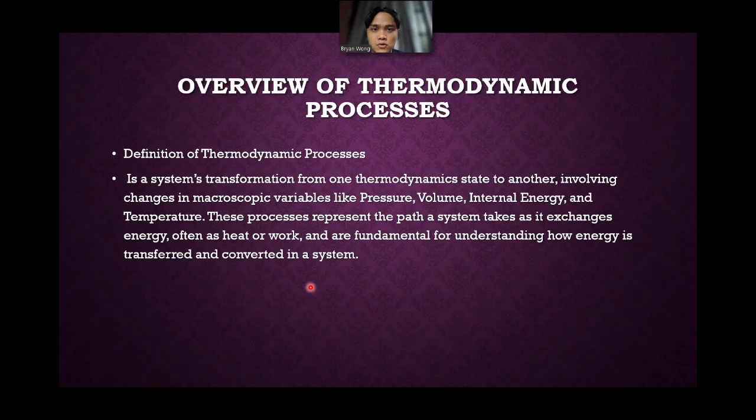So basically, thermodynamic processes discusses the exchange of energy - how it is transferred or converted. So what is the importance of thermodynamic processes in practical applications? Thermodynamic processes are fundamental in many applications, especially in the field of engineering, energy, and environmental science. They help engineers and scientists improve energy efficiency, design and optimize systems, and solve complex problems.

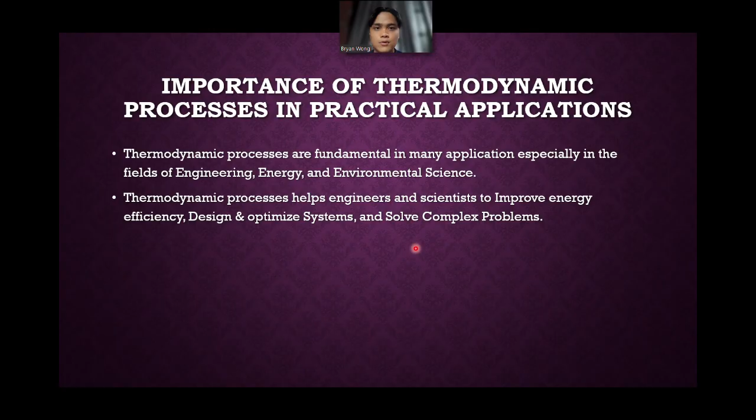Next, energy conversion and efficiency. Thermodynamic processes are the heart of energy conversion systems. Examples that use energy conversion systems are heat engines, refrigerators, and power plants. By understanding the laws of thermodynamics, engineers can maximize efficiency in internal combustion engines, for example in cars, aircraft, and power plants.

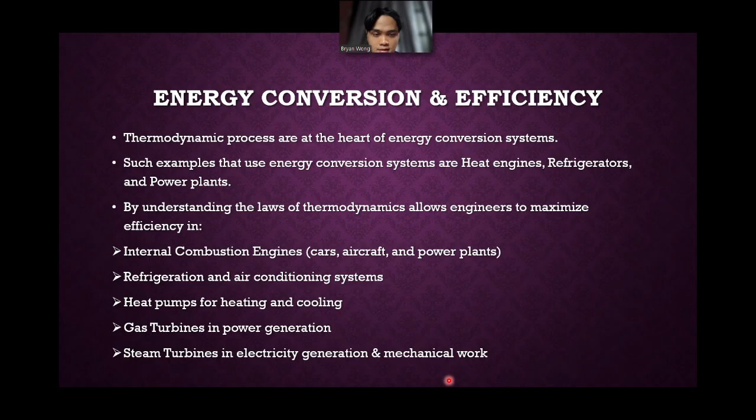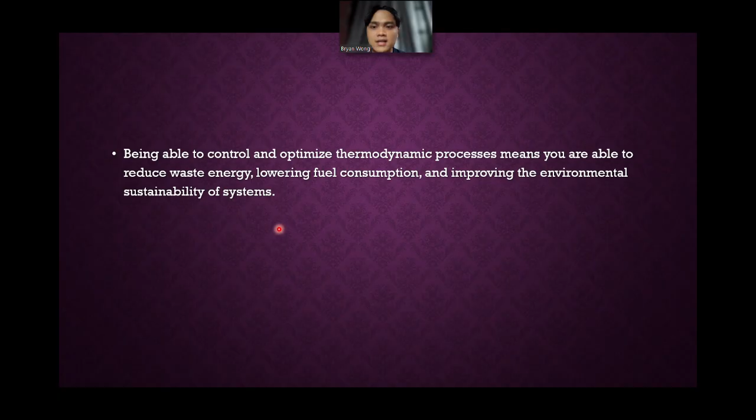Next, refrigeration and air conditioning systems, heat pumps for heating and cooling, gas turbines in power generation, and last but not least, steam turbines in electricity generation and mechanical work. Understanding thermodynamic processes allows us to maximize efficiency. Being able to control and optimize these processes means you are able to reduce the loss of energy, lower fuel consumption, and improve the environmental sustainability of systems.

Next, design and optimization of power systems. In thermal power stations - coal, gas, and nuclear for example - thermodynamic processes govern the conversion of heat into mechanical energy and electrical energy. The Rankine cycle, used in a steam turbine, and the Brayton cycle, used in a gas turbine, are examples of thermodynamic cycles that determine how efficiently a system can convert thermal energy into work.

Next, the first law of thermodynamics has relation to conversion of energy, helping us understand energy input or output relationships. The second law of thermodynamics dictates that some energy will always be lost as heat and sets the upper limit on efficiency.

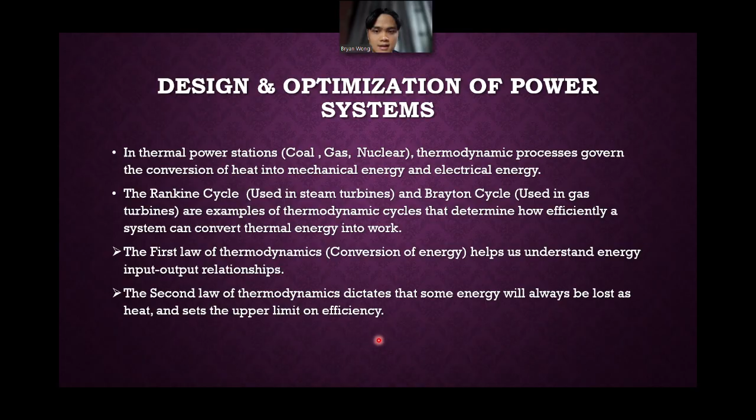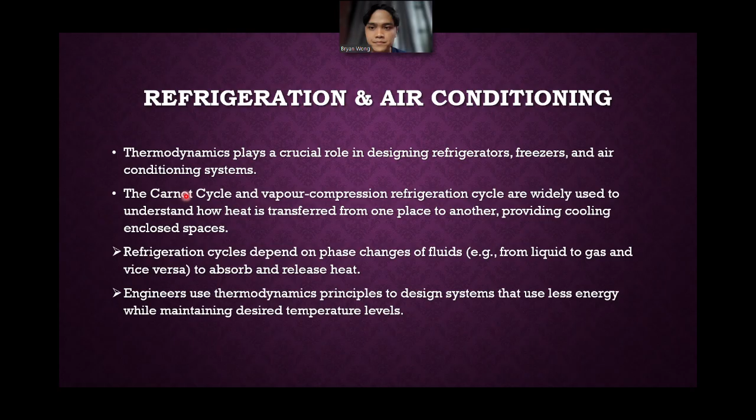Now, refrigeration and air conditioning. Thermodynamics plays a crucial role in designing refrigerators, freezers, and air conditioning systems. The Carnot cycle and vapor compression refrigeration cycle are widely used to understand how heat is transferred from one place to another, providing cooling to enclosed spaces. Refrigeration cycles depend on phase changes of fluids, for example from liquid to gases and vice versa, to absorb and release heat. Engineers use thermodynamic principles to design systems that use less energy while maintaining desired temperature levels.

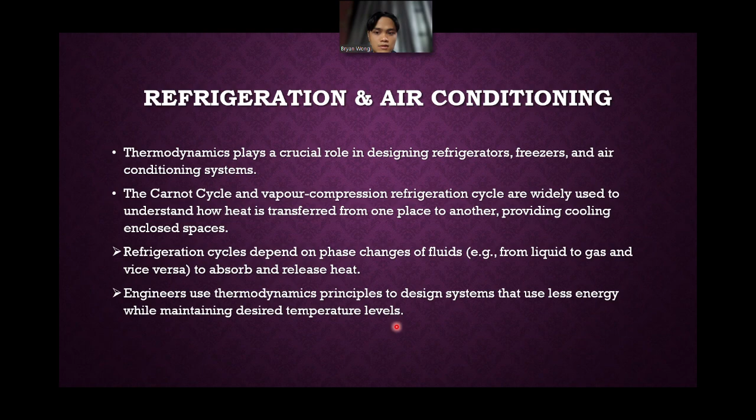So that is basically thermodynamic processes - we want to design something in order for it to be efficient and use less energy. Next, environmental impact and sustainability. Thermodynamic processes are critical in designing systems that minimize environmental impact. For example, combustion processes in engines and power plants emit greenhouse gases. Understanding the thermodynamic principles of combustion allows the design of cleaner, more efficient engines and reduces carbon emissions.

Next, waste heat recovery systems aim to capture excess heat from industrial processes or power plants and convert it back into usable energy, reducing waste and improving overall system efficiency.

Okay, so that is the environmental impact and sustainability of thermodynamic processes.

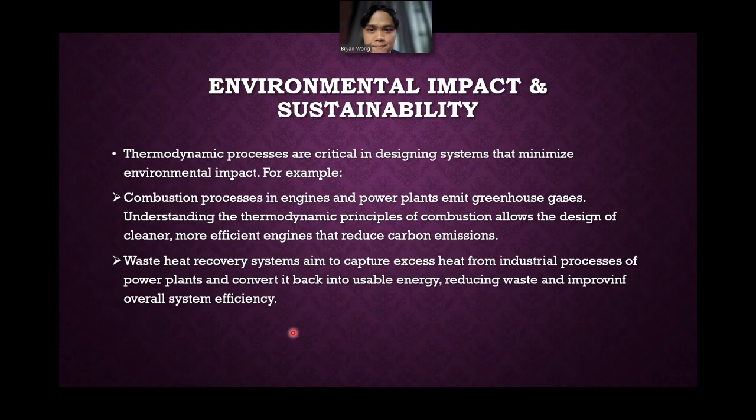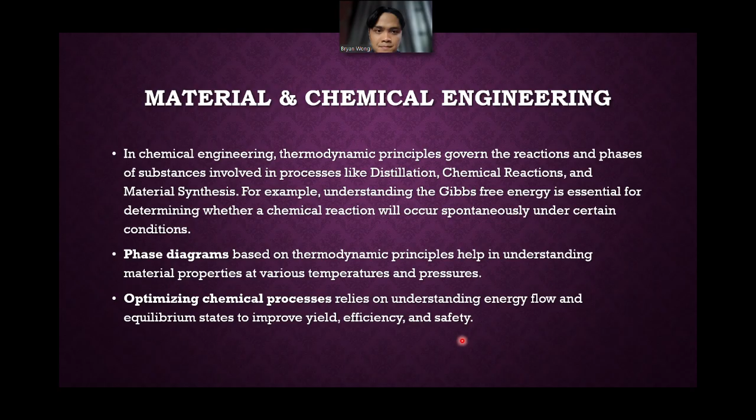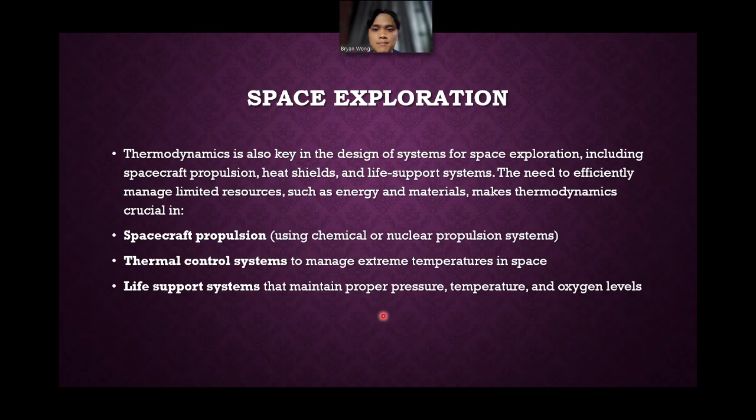The first aspect is spacecraft propulsion using chemical or nuclear propulsion systems. Next, thermal control systems to manage extreme temperatures in space. Next, life support systems that maintain proper pressure, temperature, and oxygen levels. So this is the importance of thermodynamic processes in space exploration.

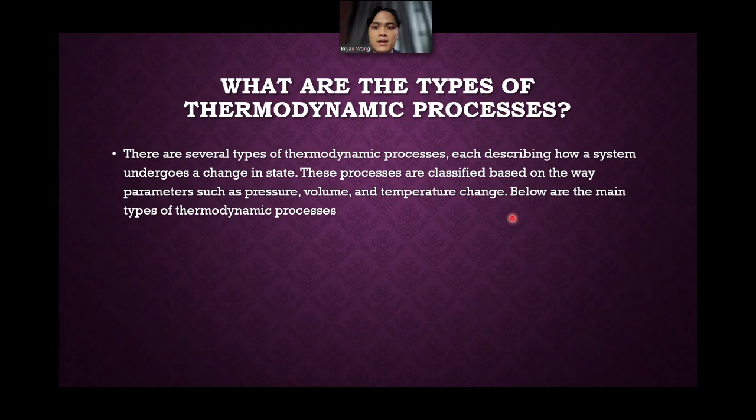Let me explain. First, one of the thermodynamic processes is the isobaric process, also known as constant pressure. The definition of isobaric process is that the pressure of the system remains constant while other properties like temperature and volume change. Example: heating water in an open container, where the pressure remains constant at atmospheric pressure.

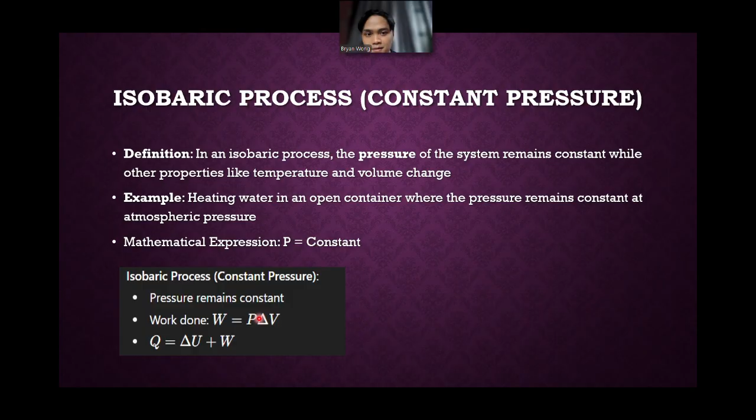So the mathematical expression is shown here: P is constant. This is the isobaric process. The pressure remains constant, and the work done is W equals P times delta V. So Q equals delta U plus W. This is the formula and mathematical expression for isobaric process.

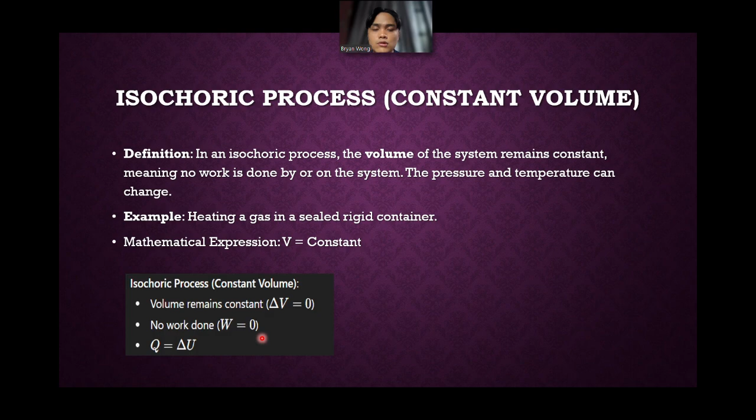Okay, next one is the isothermal process, or constant temperature. The definition is: in isothermal process, the temperature of the system remains constant, meaning the heat exchange is fully used to do work or change the system's internal energy. For example, slow expansion or compression of gas in a cylinder that remains at a constant temperature. The mathematical expression is T equals constant, temperature is constant.

This is the equation for isothermal process: temperature remains constant, delta T equals 0. Internal energy remains constant, delta U equals 0. So work done is W equals Q.

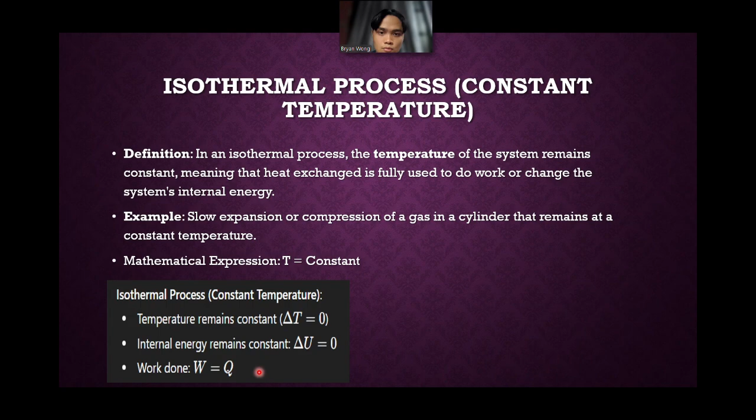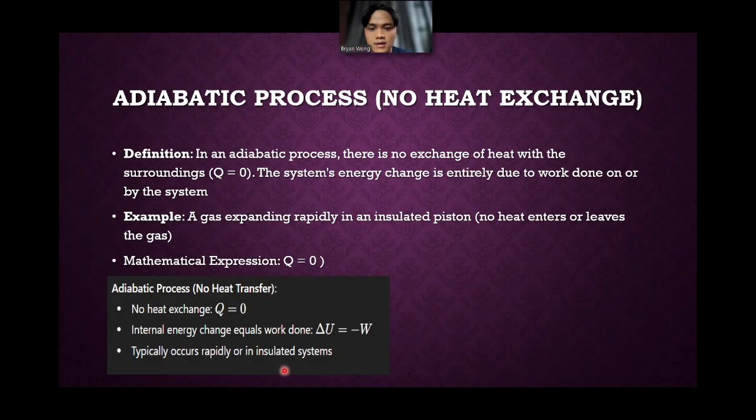So we have learned about the types of thermodynamic processes already. Now let me explain the first law of thermodynamics to you. What is the first law of thermodynamics? This one is not alien to you, you know and you've heard about it. The first law of thermodynamics clearly states that energy cannot be created nor destroyed, it can only be transformed. That is the first law of thermodynamics.

The mathematical formulation for this law is delta U equals Q minus W. Delta U equals change in internal energy, Q is the heat, W is the work done. The application is how it governs the conversion of heat to work in engines and other systems.

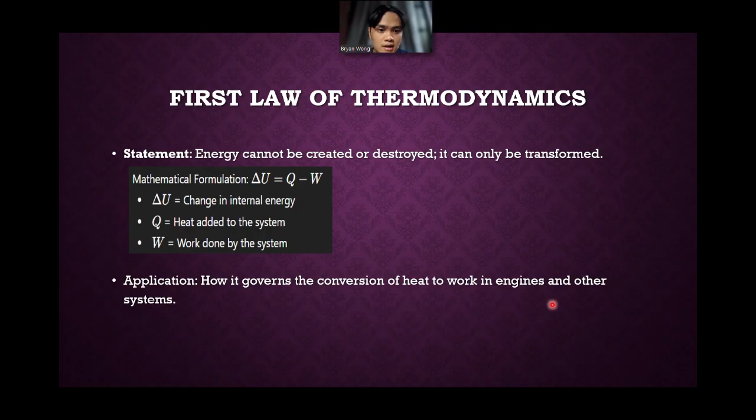Next is key thermodynamic quantities. Heat is represented by Q, energy transferred due to temperature difference. Work, represented by W, is energy transferred when a force acts over a distance. Next is internal energy, U, the energy contained within a system.

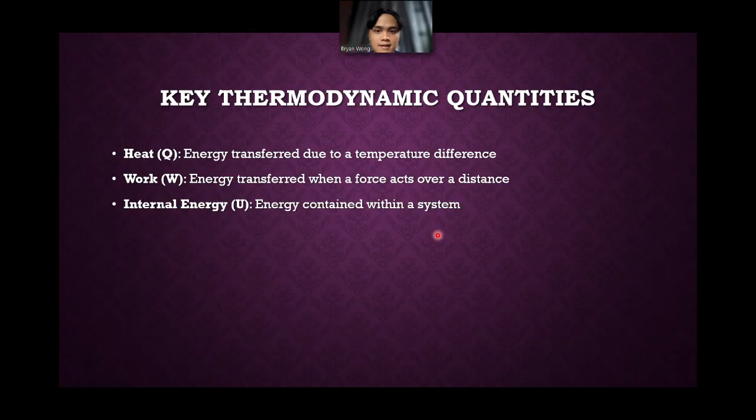Next is work done by expanding gases. This is the formula for work done by expanding gases, in various processes.

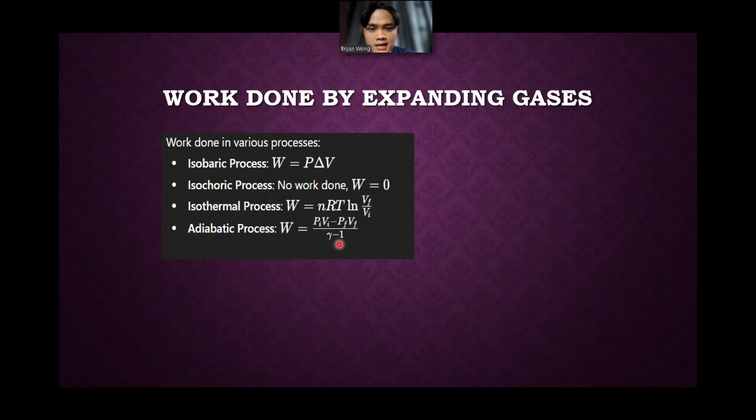In an isobaric process, the work done formula is W equals P times delta V. For an isochoric process, there's no work done, so work is 0. In an isothermal process, work equals N times R times T times ln(Vf over Vi). In an adiabatic process, work done equals this formula here.

Now next is thermodynamic cycle. The definition is a sequence of processes that returns a system to its initial state. Examples of thermodynamic cycles are the Carnot cycle, Rankine cycle, and Brayton cycle. Each of these cycles involves a series of isothermal, adiabatic, isobaric, and isochoric processes, which we have gone through just now.

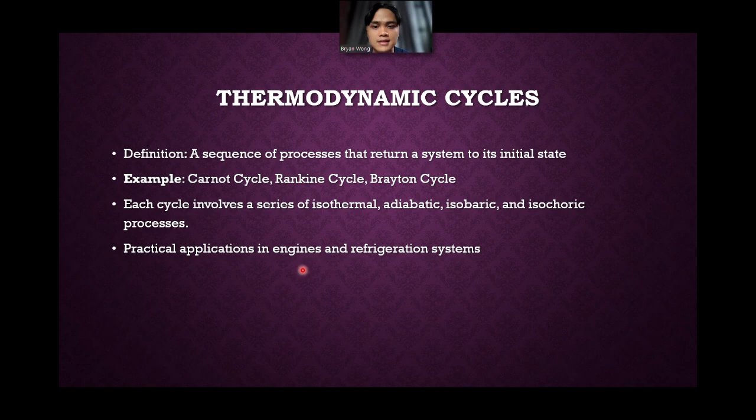Practical applications are in engines and refrigeration systems. All of this can be seen applied in engines, aircraft, and refrigeration systems.

Next, thermodynamic processes in real world systems. This is an example, they can be seen in real world systems. As you can see, steam cycles: work is done in power plants. In internal combustion engines it's the Otto and diesel cycle. In air compressors it's adiabatic compression. In refrigeration systems it uses the vapor compression cycle. This is the example of real world systems that use thermodynamic processes.

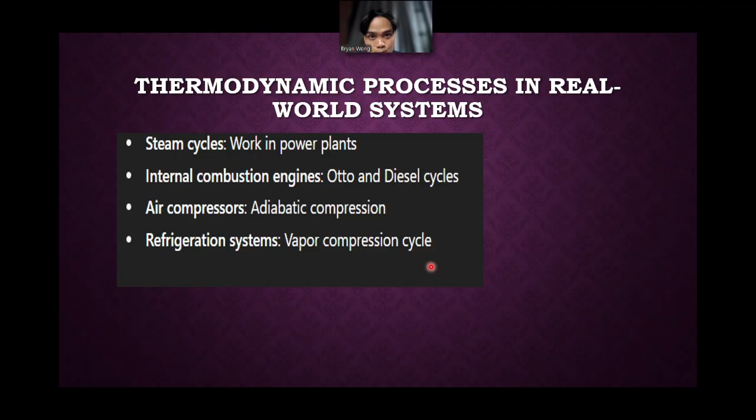We have reached the end of our lesson already. That's all for our chapter 5. It's simple, it's talking about the thermodynamic processes.